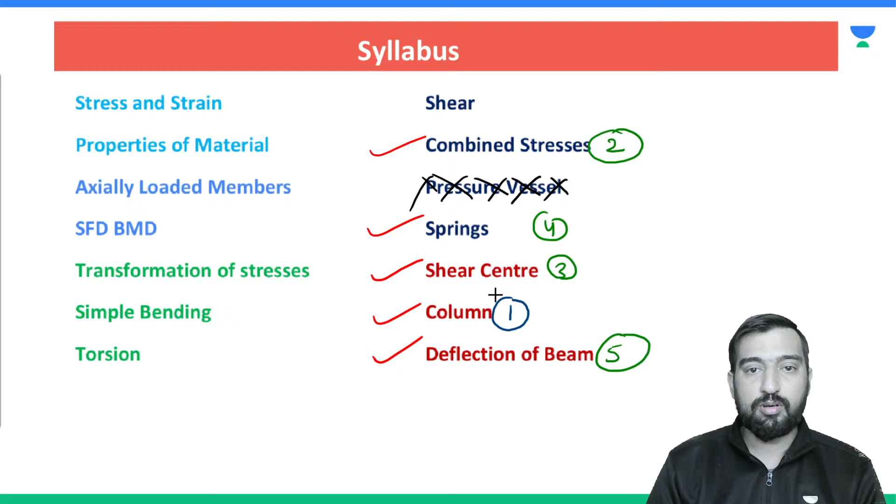So nearly 40-50% of the time I would like to spend on these 4 topics, and deflection of beam I am going to take at the end, because this requires more time.

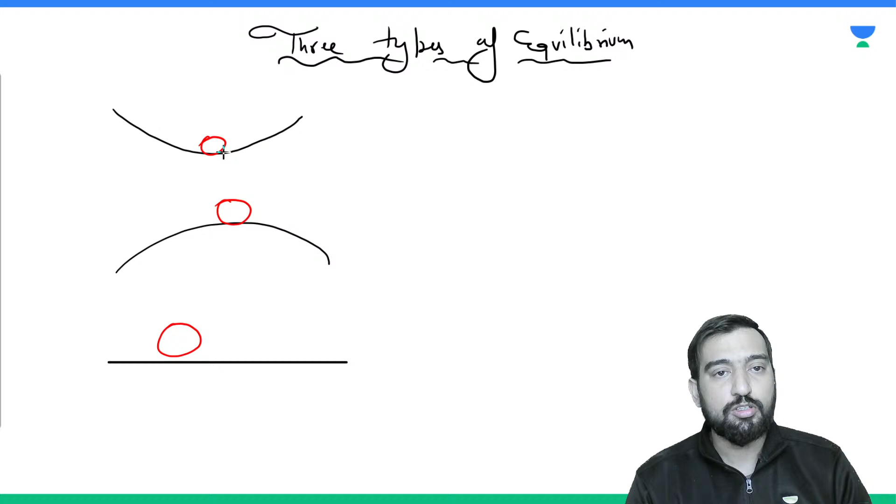Stable equilibrium is stable because even if you disturb this ball, or any system, by a small amount, it is not going to create a problem. After some time it will again come back to the original position, like your spring mass system, like your pendulum and so on.

Unstable equilibrium is where the object is at the verge of failure. The moment you touch it, the object is never going to come back to its original position. This is unstable equilibrium.

So this is stable equilibrium, this is unstable equilibrium, and neutral equilibrium is this. Here also the particle is in equilibrium, but if you disturb it, it will come to its revised position, but there also it will maintain its equilibrium. It is your neutral equilibrium.

So in the design and analysis of column, the thing we have to keep in mind is stable equilibrium. Based on that, you might need to do several calculations for calculating critical load.

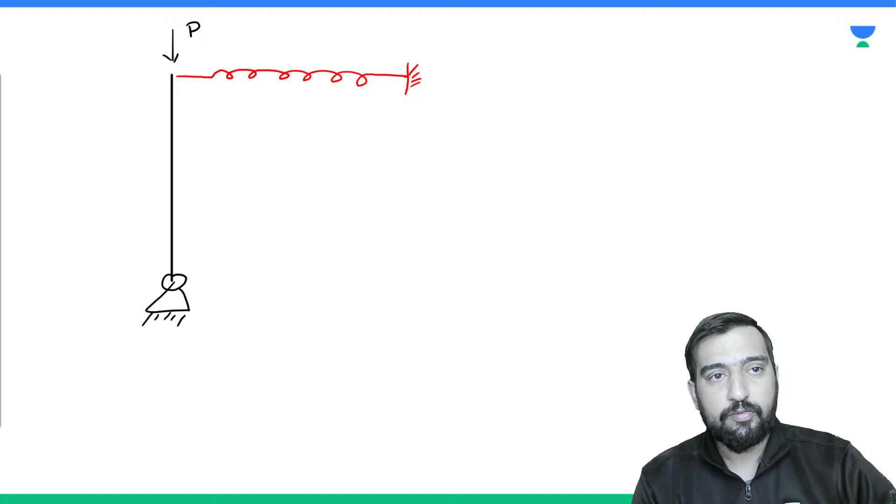For example, suppose this is the simplest of simple columns, not beam, attached to, let's suppose, some spring. I will give the introduction to spring now. Suppose if you apply here any load P, and if the stiffness of this spring is K, what is the critical load when it is going to fail?

It will fail when there is generation of an overturning moment. So what is the overturning moment here? On its deformation, it may deform like this, or vice versa can also be the case. So this is the revised position of P now.

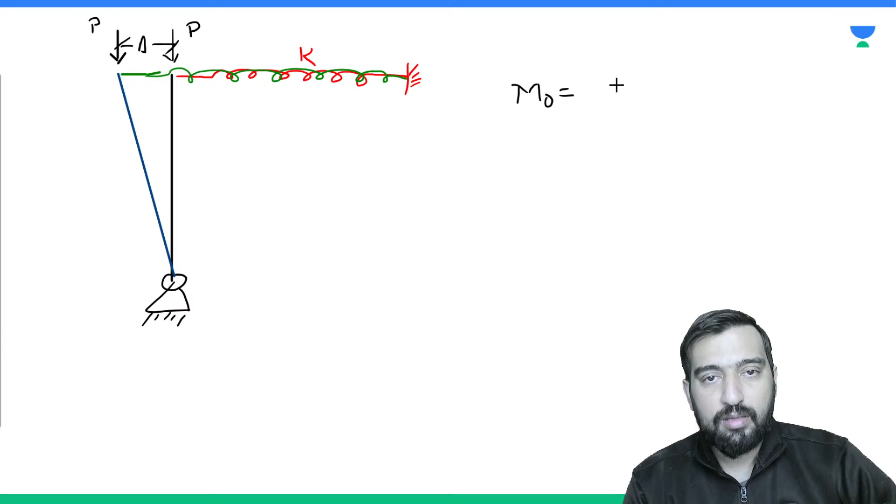Let's say this displacement with respect to its mean position is x, or you can say delta. This overturning moment is nothing but P into delta. Now what is the resistant moment if the length of this column is L? What is the resistant moment due to this lateral confinement, due to this spring?

If you draw the free body diagram of this spring, it will look like this. So here the force generated would be K into delta, and the same K into delta would be acting here. So resisting moment would be force into displacement into lever arm.

The lever arm is L. So for stable equilibrium, the overturning moment P delta is equal to K delta L. Delta and delta will cancel, and from here you can calculate the critical load, which is equal to K into L. As long as your load is less than K into L, you would be safe.

Similarly, you can repeat this exercise for multiple springs restrained at the same level as well as at multiple levels.

After this, we would be dealing with the various theories of failure of column. What are the various theories of column? Generally we use two, but let's go in order: Euler's theory we will be seeing first, and the second one is Rankine theory. Both of these theories we have to study here.

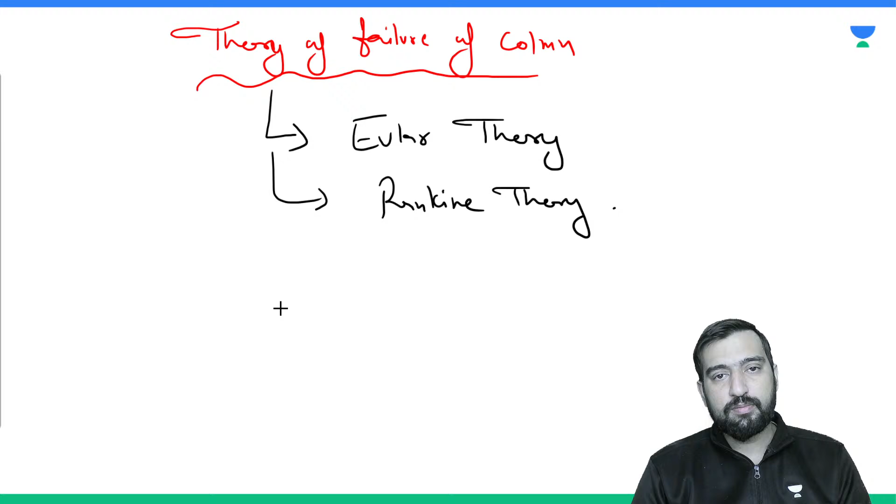So what are the various assumptions involved in Euler's theory? What is Euler's theory? I will explain. First, give the heading Euler's theory. Let's first write the assumptions, then I will explain in detail. The assumptions involved in Euler's theory are: first, that the material is isotropic, homogeneous, and linearly elastic.

Third assumption is very critical, and it is also a cause of limitation in Euler theory: here the failure is considered due to the long column, meaning failure will be due to buckling. So the column under analysis is assumed to be a long column. This is the limitation of Euler theory. That's why Rankine theory came, which took care of crushing for short columns as well as long columns. But Euler's theory is only valid for long columns, which have a higher value of slenderness ratio.

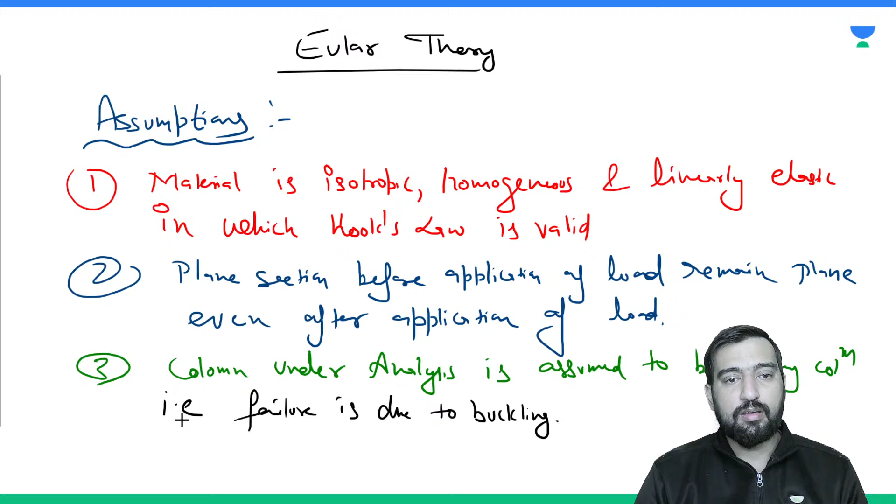So the third assumption means failure is due to buckling only. This theory is only for long columns. Are you getting the point or not?

One more assumption is there, which is a common sense thing: before the application of load, the column was perfectly straight. Initially the column is straight, meaning its line of action is maintained, before the application of load.

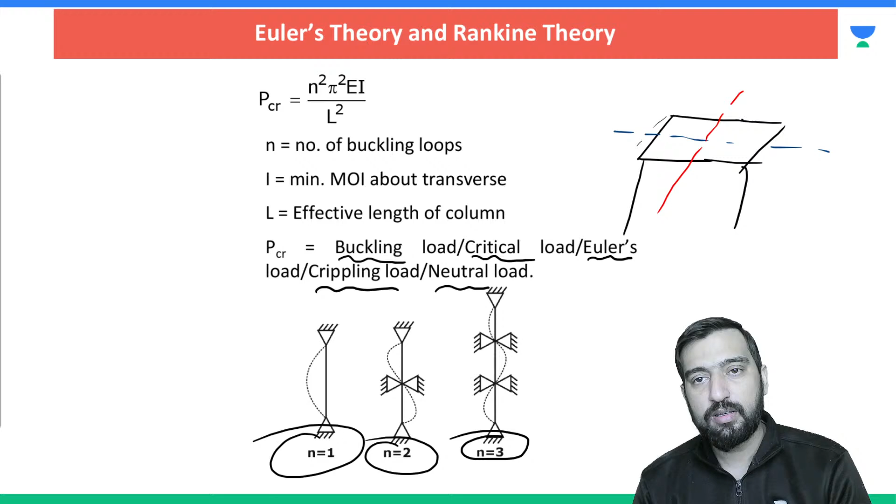So this is the value of n, and I is the moment of inertia of this column section about the transverse axis, and there are 2 possibilities while taking I. Suppose this is your cross section of the column, this is one axis, and this is another axis. So here you can see which cross section you take, moment of inertia about which axis matters - this is one case, this is another case. Whatever is the least moment of inertia, that we have to consider. That's why it is written minimum moment of inertia about the transverse axis.

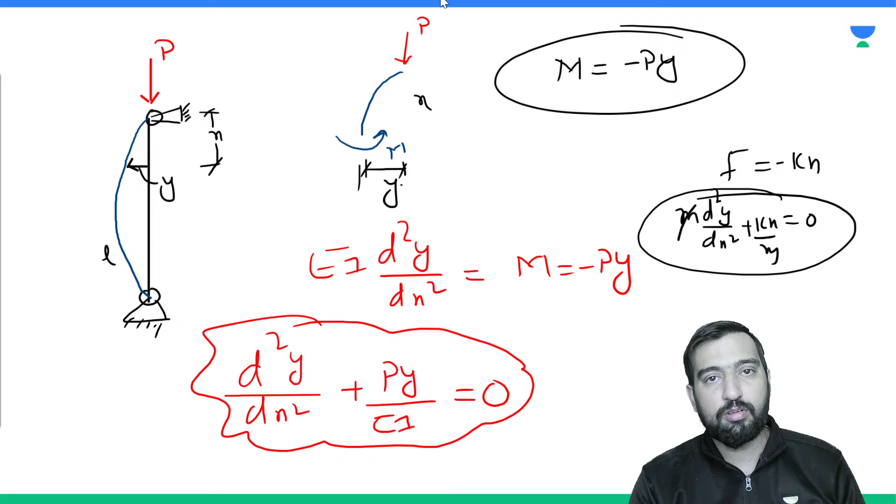and at x is equal to L, y is equal to 0. So at x is equal to 0, this is 1, this is 0, y is equal to 0, so c1 is coming out to be 0. At x is equal to 0, y is equal to 0, from that c1 is coming out to be 0.

And at x is equal to L, if I am keeping y is equal to 0, then I am going to get sin(L times under root p upon EI) equals to 0. Because c2 cannot be equal to 0, otherwise the solution will vanish.

So this is the condition from the second boundary condition, at x is equal to L, y is also equal to 0. Now the general solution of sin theta is equal to 0 is theta is equal to n pi. n pi, because sin 0 is also 0, 180 is also 0, and 360 is also 0, so n multiple of 180 degrees.

So if you square this, it is L square p upon EI is equal to n square pi square. So p is coming out to be n square pi square EI upon L square. So this is what we have written here, n square pi square EI upon L square.

So by using the double differential equation, we will be able to calculate the value of critical load, where n is the number of buckling loops, pi and EI is flexural rigidity, L is the length of the column. L is known as the length of the column. Are you getting the thing or not?

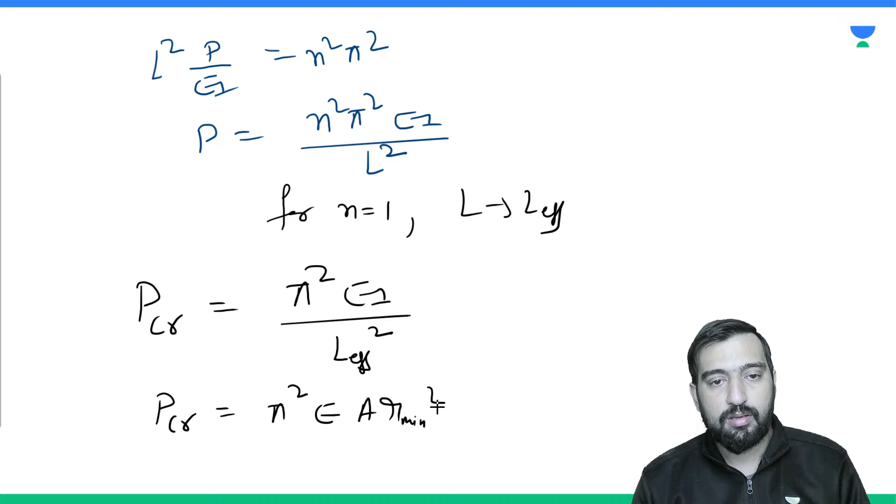So now PCR is equal to pi square E. What is I? I is area into R minimum square upon L effective square. So PCR can also be written as pi square E area upon (L effective upon R) whole square.

R is which one? Minimum radius of gyration, and L effective upon R, you all know it is known as the slenderness ratio. It is known as the slenderness ratio. So pi square E area upon lambda square, where lambda is

slenderness ratio. Okay, so now PCR upon area can be written as pi square E upon lambda square, and PCR upon area is known as the critical stress or buckling stress. So this is also the very common expression which we use in the analysis of column. I hope it is clear to you here.

So this is where sigma CR is buckling stress. It is buckling stress. And here L effective we have taken, and I hope you all know what is L effective. L effective is the distance between two zero moments. Let me write it.

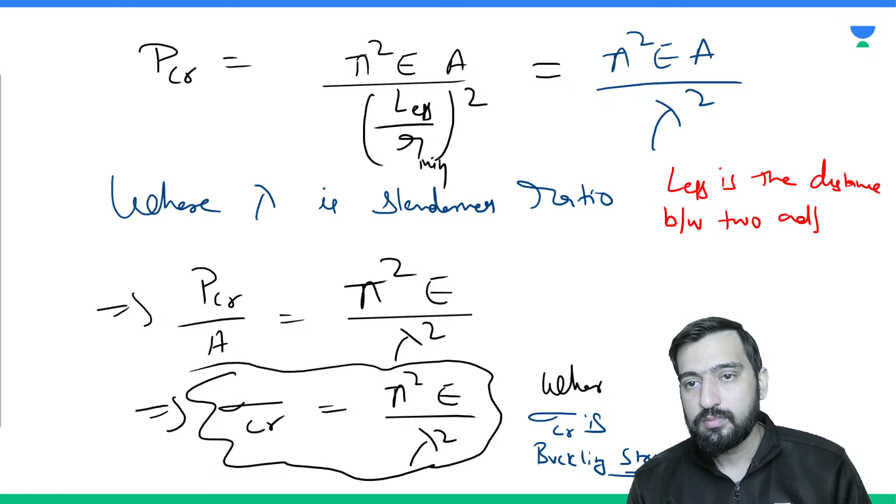It is the distance between consecutive contraflexure points, or you can say it is the distance between two continuous contraflexure points.

Now for calculating L effective, we have some different conditions, so let me revise quickly. If we have a pin end connection, what is L effective? Suppose this is L, then L effective is equal to L only.

Similarly, if we have one end fixed and one end pinned, then L effective is L by root 2. All these are the solutions of Euler's buckling theorem.

If both ends are fixed, these four cases are very widely used, then L effective is L by 2. If we have one end fixed and one end free, then L effective is 2L. So please remember at least these four cases of L effective.

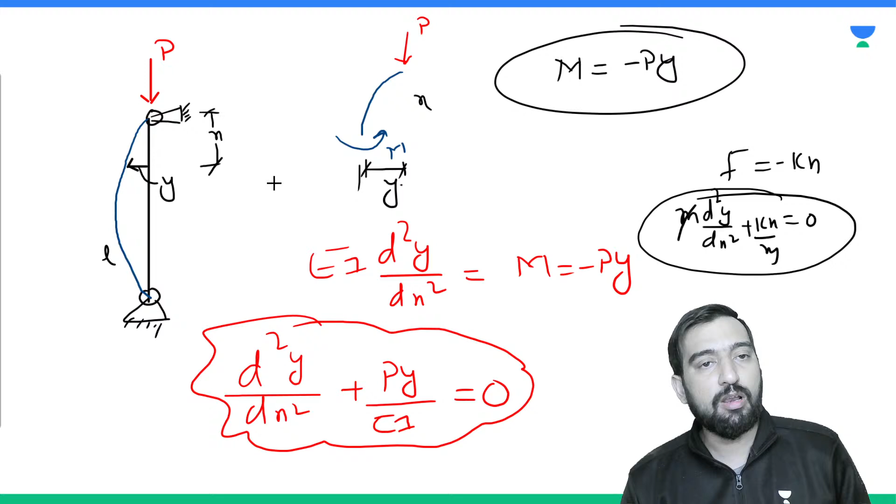You must have noticed when we derived this, we created a bending moment here, and bending moment is only there if the column is about to buckle. In a column, bending is only possible if it is subjected to some buckling force. So the first limitation is Euler theory is not applicable for short columns.

Yes, that means axial stress is not taken into account, meaning short column.

Why is it a limitation? Because in a short column, crushing happens before buckling, so it fails before buckling even occurs. Are you getting this thing or not?

So if somebody asks you what is the minimum slenderness ratio so that Euler's theory can be applied, if I ask you which is the minimum slenderness ratio above which you can apply Euler's theory, you can find it out. I think I have told you, not directly but indirectly. How? We have seen this.

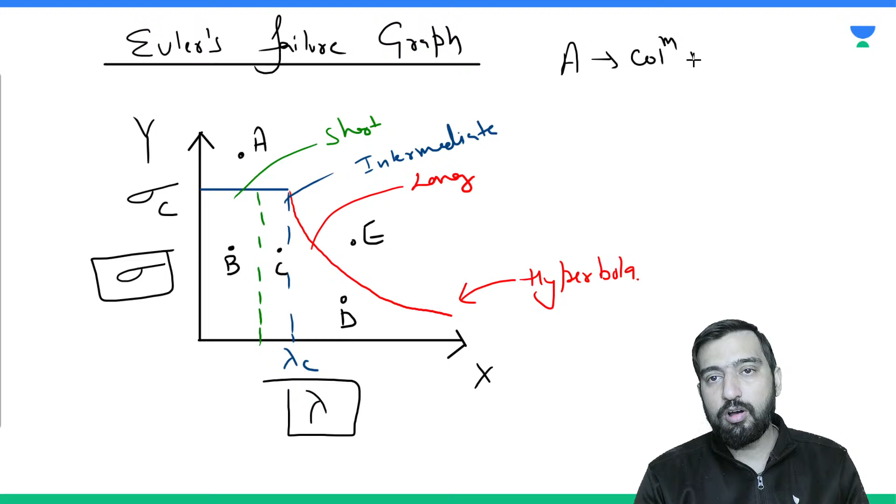If I am talking about point number A, this A point is lying in the short column zone, but the value of stress which A is going to experience is higher than the critical value. So at this A stress, my short column is going to fail. So A is giving you a point where column is short.

And it is unsafe. If I am talking about point number B, then again I can say that column is short, but it is safe.

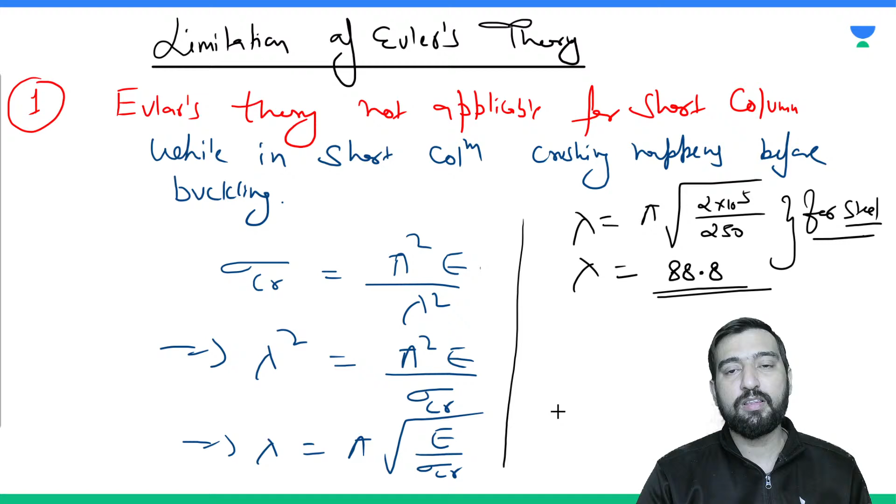Now this is all about Euler's theory. The crippling load expression I have derived for you, assumptions I have written for you. Based on the different end conditions, I have also given you the effective length. Limitations I have also explained, and when we can use it for particular material I have discussed, specifically for mild steel. This is the Euler's failure graph.

Now to overcome this problem, we do have Rankine theory. Rankine theory takes care of short column as well as long column. So first of all, it is applicable for long and short column both.

And it means, that is, it assumes the mode of failure as crushing and buckling both. Are you getting the point or not? Tell me.

Okay, here the Rankine crippling load or failure load is given by actually a harmonic average: 1/P is equal to 1/Pc plus 1/Pe, where Pc is due to crushing and Pe is your Euler load.

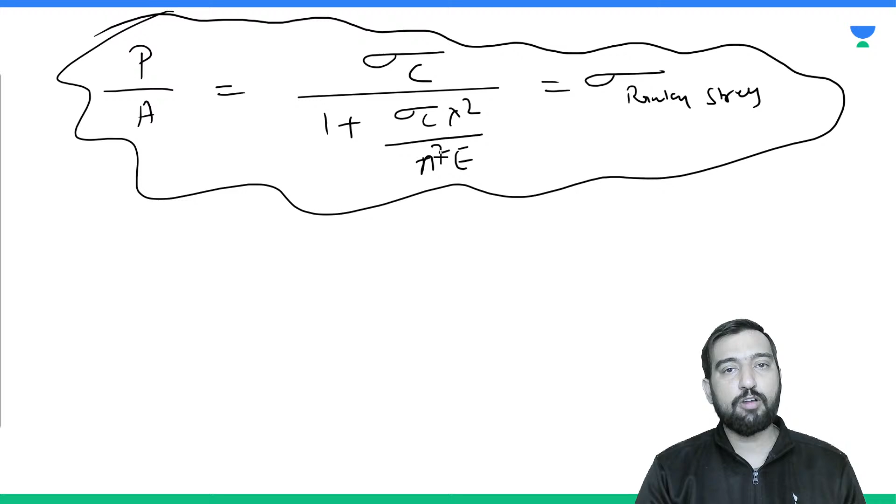We can also say that P by A is sigma c over 1 plus alpha lambda square, where alpha depends from material to material. For steel it can be different, for cast iron it can be different, for timber or wood it can be different. Generally alpha is 1 upon 7,500 for mild steel. It is 1 by 1600 for cast iron, and it is 1 by 750 for timber.

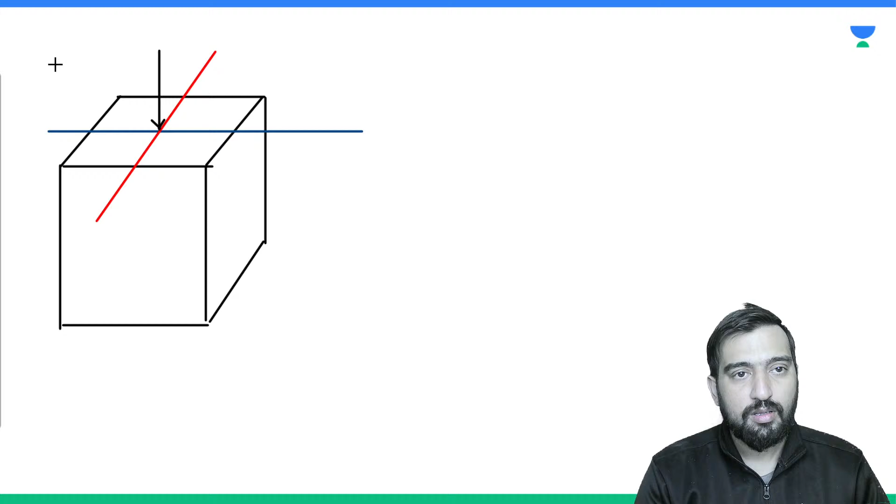If my load is acting over this intersection, maybe like this, so this is P, and let's suppose this column is fixed at base, and here its area is let's suppose A. Now what will be the stresses here?

The entire stress is due to the compressive stress. What compressive stress is acting here? It is P upon area. So here only one stress is acting, and that stress is normal stress or axial stress, that is P upon area.

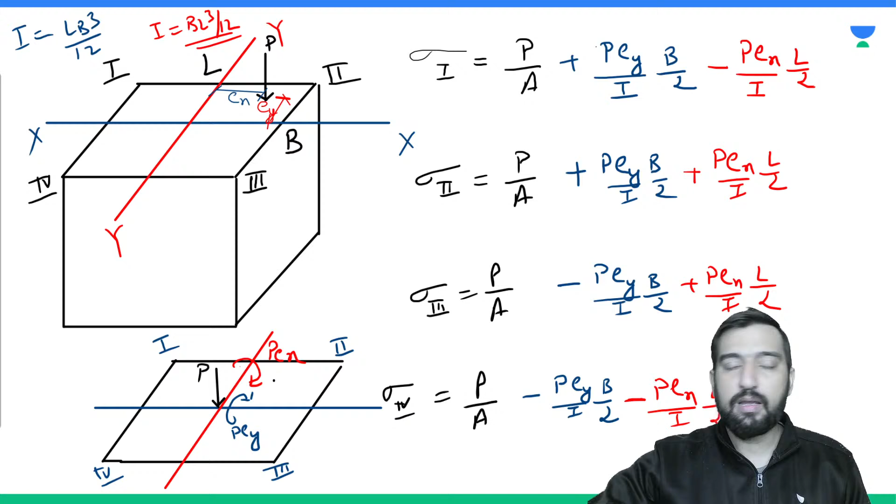So this is our x and this is our y. So this is all about combined stresses. We can make several observations out of here.

Okay, we can make several observations out of here, and you might have heard of the middle 1/3 rule. For uniaxial loading, suppose if this is my column, let's suppose this is L and this is B, and this is your x-axis, this is your y-axis. If you want to find what is the safe distance along one side of the axis such that about that axis no tension is developed, let's say this is P, and it is here at an eccentricity E.

So if you want to check for what value of E you are not going to have tension anytime, irrespective of the magnitude of load, then how do you calculate it? So tension would be developed at the critical surface. So this is my point number 1, this is point 2, this is 3, this is 4. So tension would be developed here in cases 1 and 4. So I can take either point, either 1 or 4.

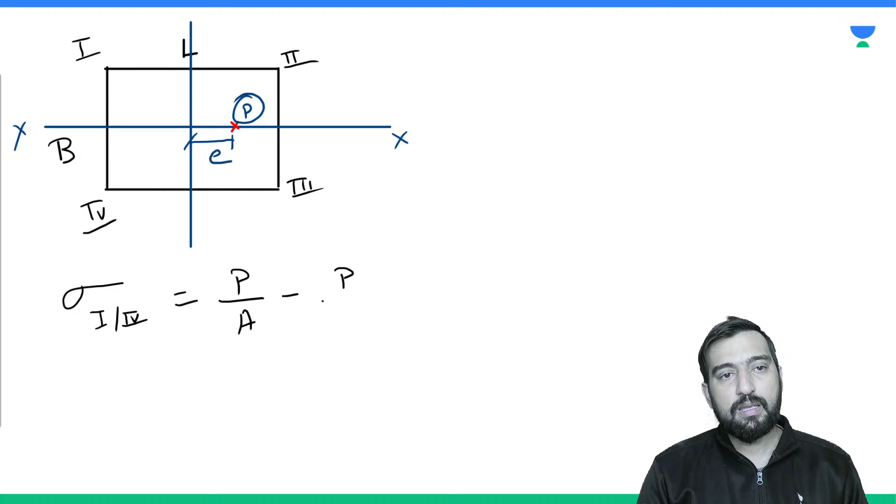So stress at 1 and 4 would be how much? This would be P upon area, minus PE upon I into Y. Y is here L by 2. So if I want to keep this stress always equal to 0 or greater than 0, let me write P upon LB minus PE upon I, where I is BL cube by 12, into L by 2. This I always need to keep greater than or equal to 0.

So if we are going to calculate: 1 over LB minus 6E by L square B is greater than or equal to 0. So L and L cancel, B and B cancel. So E is less than or equal to L by 6. Or if on one side E is L by 6, then on the other side it is also L by 6.

So indirectly, if we are keeping the load in the middle third portion, then we will never be getting tension in our column, irrespective of the magnitude of the load. Whatever is the magnitude of load, if that load is lying within the 1/3 portion, then no tension will be developed. Okay, is it clear?

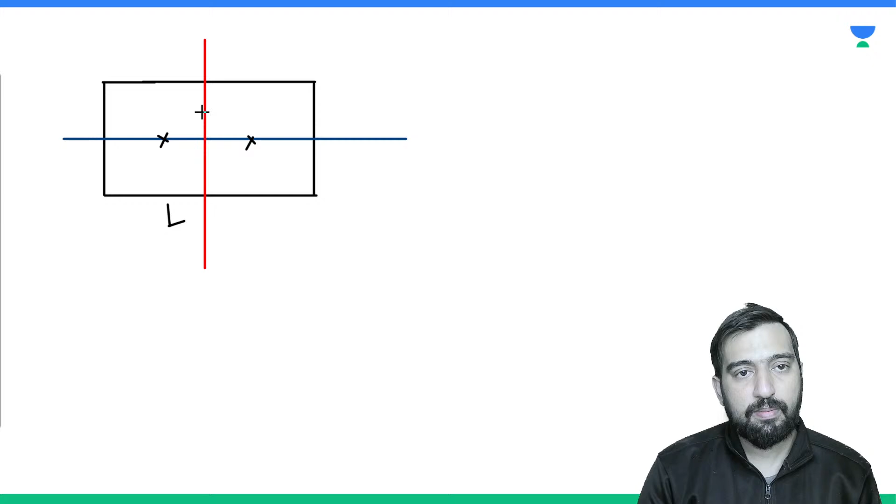This is L/3, this is L by 3. Okay, this is B by 3, this is B by 6, B by 6, B by 6, L by 6, L by 6.

So for 2D bending, for combined bending, if you are joining these 4 points, then in this area, wherever you are going to provide load, it is never going to give you tension at any corner. This area is known as kern, K-E-R-N. This area is known as kern. And here you can see that this rectangular column is going to have this kern.

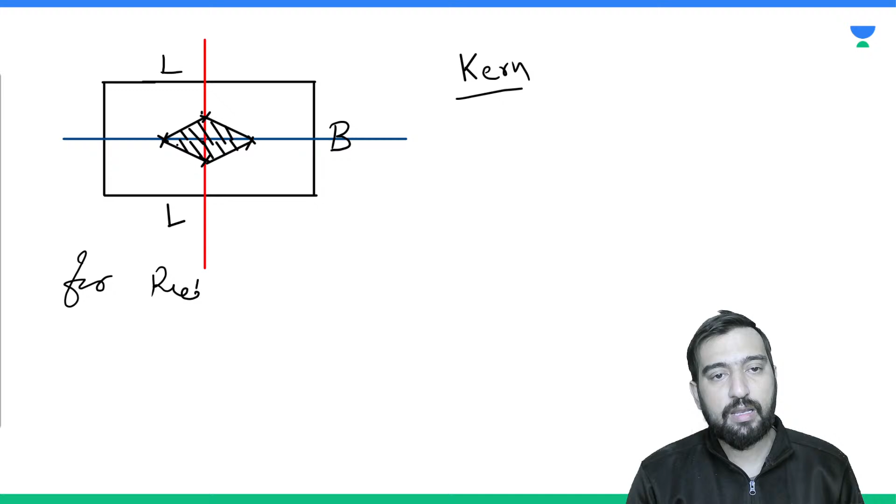So you know that if this is rectangular, for a rectangular beam, kern is a rhombus. Okay, within the kern, if load is applied, then no tension is developed on the cross section. Okay.

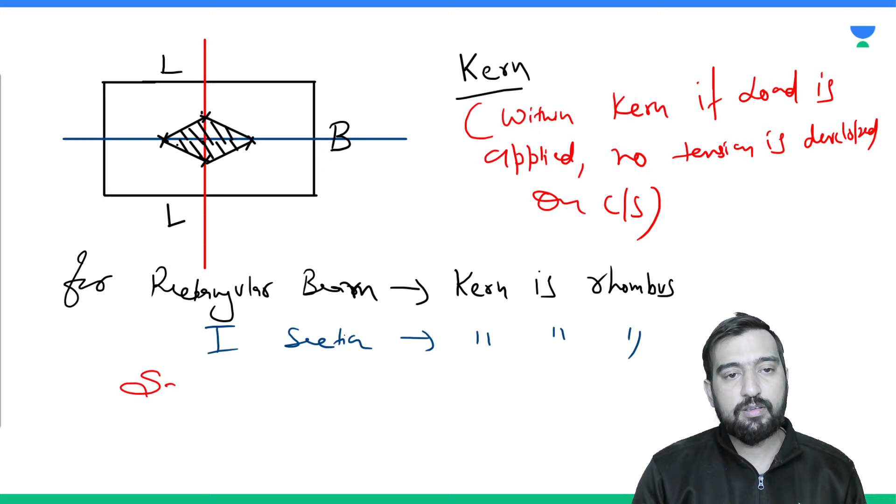Now someone might ask, for an I section also, is your kern a rhombus? For a square section, anybody, what is the shape of the kern of a square section? It is square only. And for solid circular section, the shape of the kern is circular only. And for hollow circular section, the shape of the kern is circular only. Yes, it is the safest part of any section. Yes, all circle, for solid circular and hollow circular.

And in case of circular section, the diameter, I think it comes out to be d by 8. Yes, and the middle portion is d by 4, 25% of the diameter. Okay, 25% of the diameter is safe. In the middle, 25% is safe in case of a circle.

You can also check this. Suppose we have a circle, and let's check it. It's not a straight line. So if this is the position of the load, let's say this one, then here P upon area, pi by 4 d square, minus P into e upon I into y, is greater than or equal to 0. So P and P cancel, pi and pi cancel, d square and d cancel, and this becomes 16. Yes, e is less than or equal to d by 8. So it is d by 8. So its locus is symmetrical. So it is going to be like this. So this is the kern here.

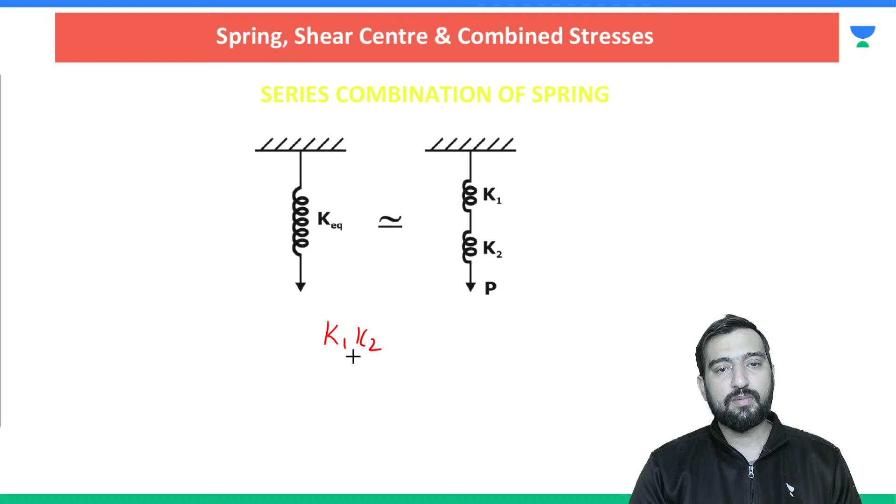And we all know how we do the calculation in series and parallel. So if this is a series connection, then the K equivalent would be product by sum. And if it is a parallel arrangement, then it is simply addition of the individual stiffnesses - it is K1 plus K2, and we can calculate the combined value.

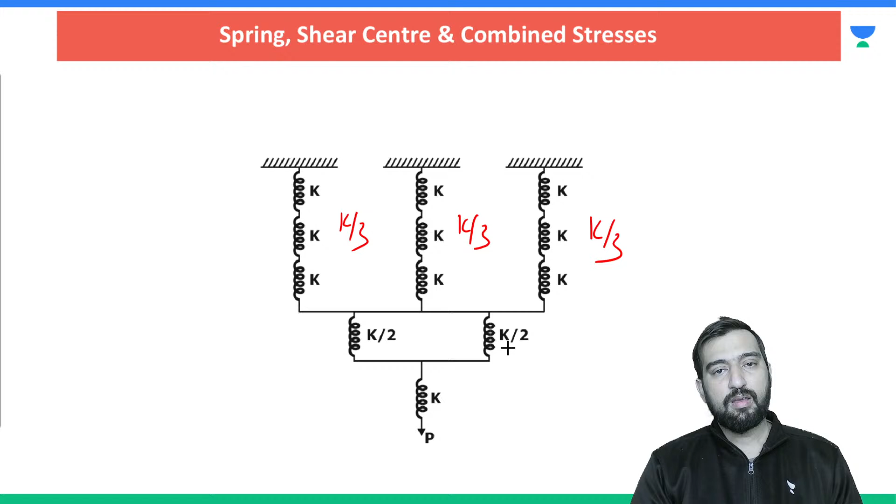So here it is K, so it would be K by 3, K by 3, K by 3, and this K by 2 and K by 2 is there, and these both are parallel so they become K only, and these three are parallel so they become K only, so overall answer is K by 3, because again this and this would be in series, so overall answer would be K by 3.

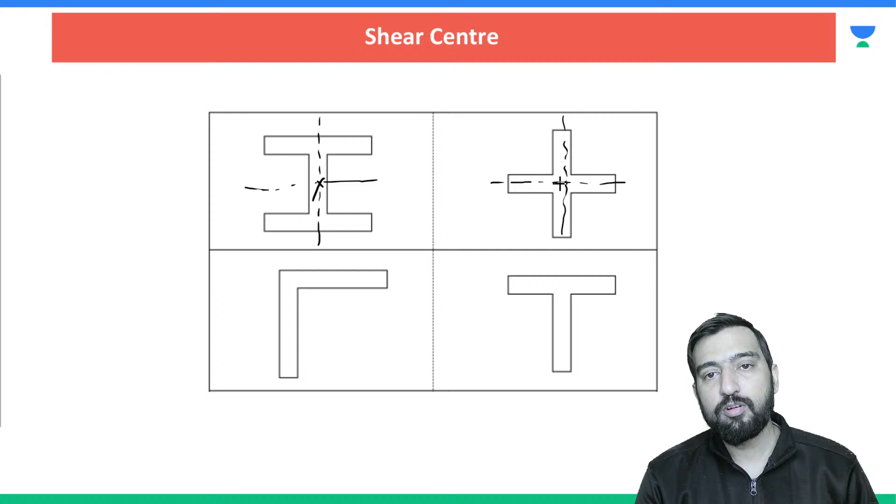अच्छा, यहाँ पे shear center कहाँ होगा? It is having two axis of symmetry, it would be here. It is having two axes of symmetry, it would be here. It is having no axis of symmetry but intersection is here. It is having two rectangular, it is here. So these are the possible ways to locate.

It is not center of mass. No, please do not confuse with the center of mass. है ना, यहाँ पे center of mass थोड़ी ना यहाँ पे आता है, इधर center of mass यहाँ थोड़ी ना आता है. ये वो center है जिसके about आपकी eccentricity develop नहीं होती है, और eccentricity develop नहीं होगी तो torsion नहीं होगा. It is not center of mass, dear दक्ष. आर यू गेटिंग द पॉइंट और नॉट? क्लियर है?

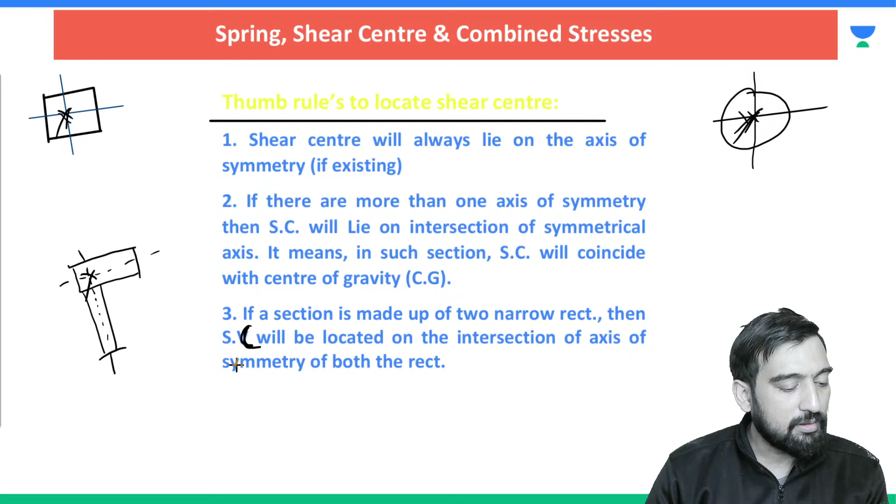होलो सर्कल और ओपन स्लिट में डिफरेंस क्यों है? अगर ये कंप्लीटली क्लोज्ड होता, ठीक है, अगर ये कंप्लीटली क्लोज होता डियर then it would be center, because multiple axes of symmetry are going to pass through center only. But due to this open gap, it is acting like a C section.

इसके अंदर जो प्रॉपर्टी आ गई वो C section की आ गई. And on C section, center is deviated on one side. So here as well you can see center is deviated on one side. But had it been a case of hollow circular, then it would be having multiple axes of symmetry, and the shear center must have passed through the center of the circle.

Okay. Clear hai? Is it clear here? It is not connected now, it is not uniform now. It is going to act like a C section. Are you getting the concept, ऋषिकेश?

चलिए अब स्टार्ट करते हैं अपना आखिरी टॉपिक, ड्रैगन टॉपिक. ये है हमारा स्लोप एंड डिफ्लेक्शन. एक ब्रेक ले लेंगे इससे पहले, स्लोप एंड डिफ्लेक्शन चालू करने से पहले एक ब्रेक हो जाए.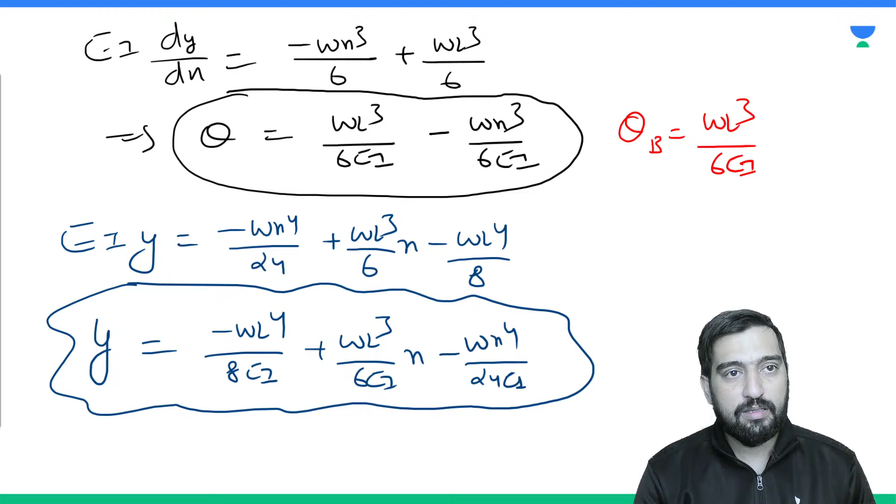So you can check the deflection at x is equal to 0. The deflection at B is equal to minus WL4 upon 8EI.

One time integration gives slope, two time integration gives deflection. Equation of slope and equation of deflection. But after that you have to play the game of boundary conditions. And you can check out these two results, 1 by 6 for theta and minus 1 by 8 for deflection. Focus on the magnitude.

And you were saying I should show you whether it works or not - you can see it. You can match the result here. Is it matching, dear? 1/6 and 1/8. Okay, so this is how we are going to use the double integration method.

There is one more method, an extension of the double integration method, known as Macaulay's method. Actually, when there are multiple loads occurring here, here, here and here, in order to incorporate all these loads, you need to make several functions of bending moment - one running from here to here, second from here to here, third from here to here. Such an equation when it takes this form is known as Macaulay's method.

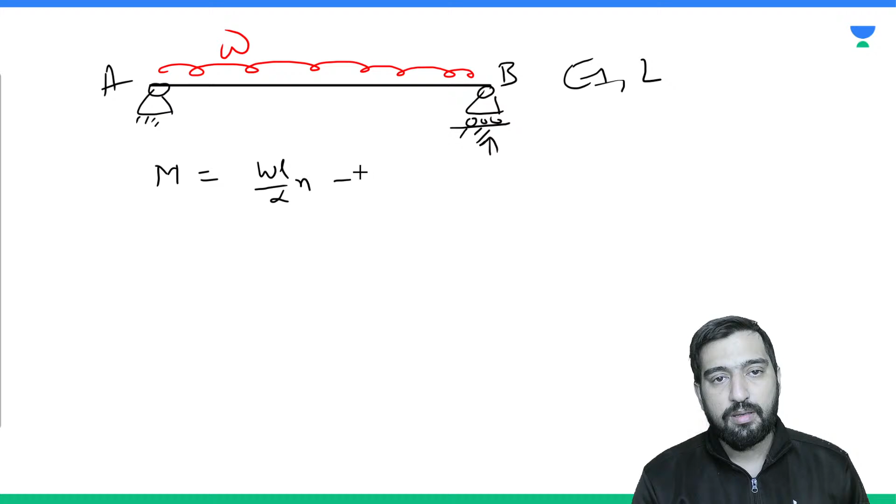So what is the bending moment equation? Bending moment equation from either side, it is WL by 2 into X minus W into X square by 2. And the good thing is this equation is going to work for the entire system.

Now if I am going to apply the double integration equation, EI d2y upon dx2, it is M. So d2y upon dx2 is WLX by 2 minus WX square by 2 into EI. Now integrate it twice. One time you will integrate it, you will be getting what?

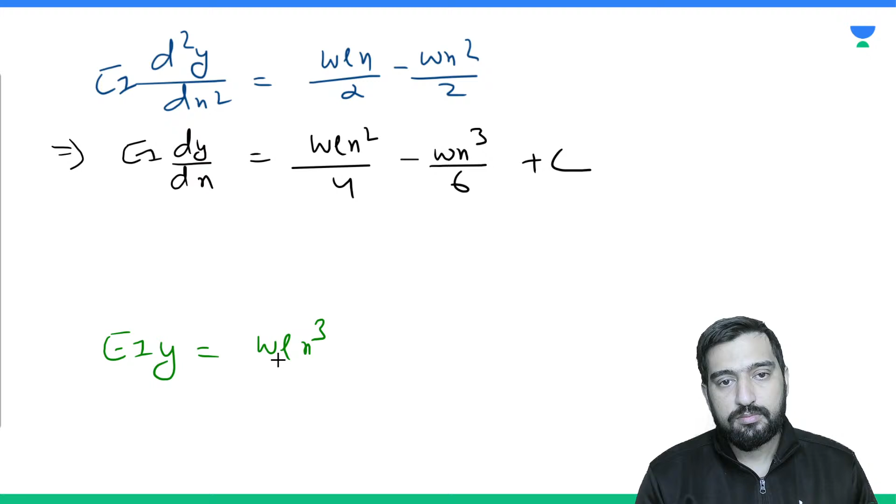Can you tell me how to find C and D? Anybody? Can you tell me how to find C and D? What can be the boundary condition here? Anybody?

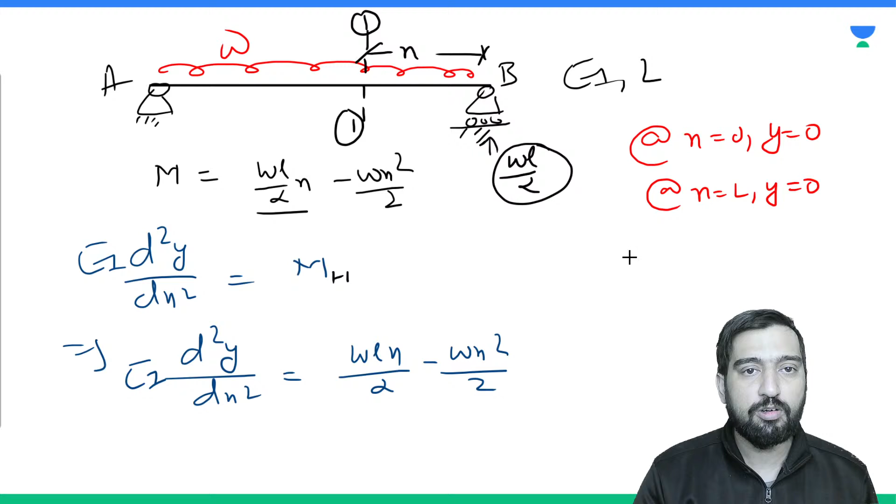So like this you can solve the problems on slope and deflection by using double integration method. And you know one good thing about double integration method, by using it you even can solve indeterminate structure. For example, we all know that this propped cantilever beam is an indeterminate structure.

We all know that fixed beam is an indeterminate structure. With the help of double integration method,

Sir, you said double integration method is good for simply supported beam, moment area method for cantilever, and strain energy method for any type of beam and frame.

Yes, I told it once, and that is also right. Double integration method is good. Actually, what I told, I am reminding you because I generally say the same things all the time. Double integration is only useful whenever you need a continuous result, the equation of slope and deflection.

Moment area method you can apply whenever there is a case of cantilever beam, or if it is a case of simply supported beam, but the simply supported beam must be symmetrically loaded. If the simply supported beam is not symmetrically loaded, you can go for conjugate beam method.

And whenever your simply supported beam is subjected to internal discontinuity like an internal hinge, you can still go for conjugate beam. But whenever you want to tackle any problem which cannot be solved easily by any of these methods, go for strain energy method, because it is a universal method, applicable for trusses, frames, arches, and every kind of frame.

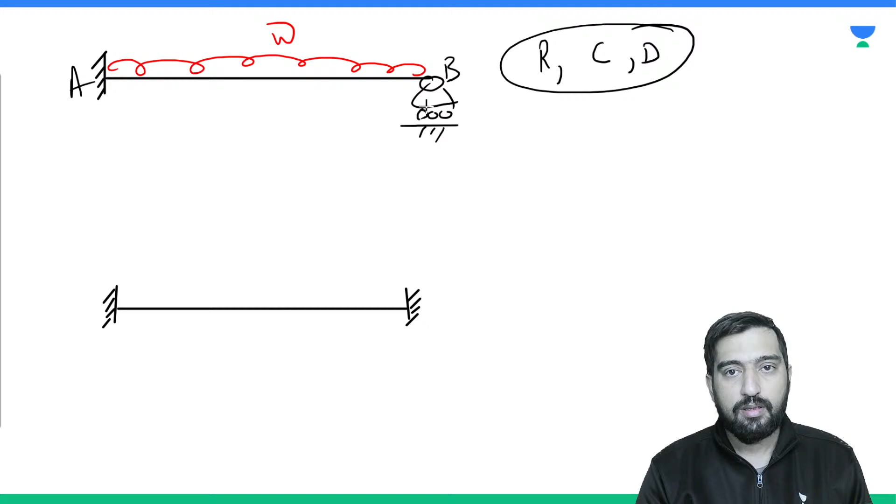So here the boundary conditions, 3 unknowns are there. At x equal to 0, y equal to 0. At x equal to L, y equal to 0. And at x equal to L, dy by dx also equals 0. So with the help of these 3 boundary conditions, you will be able to obtain R, C and D.

So your structure is solved now. Similarly, if some load is acting here, you will be needing some boundary conditions as well.

So for vertical loading, its static indeterminacy comes out to be 2. 1 reaction, 1 moment, 1 reaction, 1 moment, so you can tackle only 2. 2 unknowns are there, R1 and R2 or M1 or R2 or whatever, and 2 constants are there.

So how many boundary conditions do we need here? 4. At x equal to 0, slope is 0. At x equal to 0, deflection is 0. At x equal to L, slope is 0. At x equal to L, deflection is 0.

So by using these 4 boundary conditions, you will be able to calculate all 4 unknown parameters, and your structure becomes quite solvable. Is it clear? So this is the way to use boundary conditions, this is the advantage of using double integration method, because it also helps sometimes in your structures.

For plane structures without internal discontinuity, even if indeterminate, you will be able to solve it using this method, but it is slightly lengthy if you do not know the standard results. If you know the standard results, I will recommend other methods like moment area method, conjugate beam method, and strain energy method.

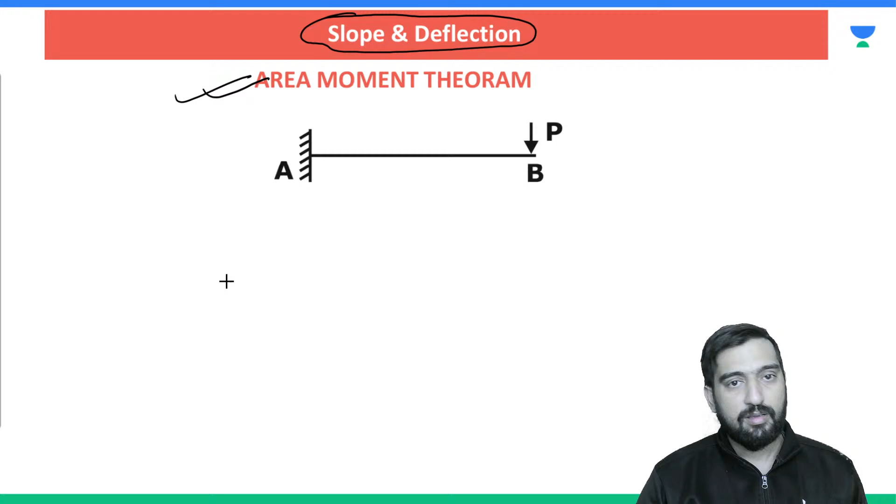Now the second method to calculate slope and deflection, which is also very famous, is known as area moment or moment area method. So in moment area method as well, it is suitable for cantilever,

and it is also suitable for simply supported beam if it is symmetrically loaded. Symmetrically loaded may be like this, it may be like this, or it may be like this. So all these are the various symmetry, or it may be like this.

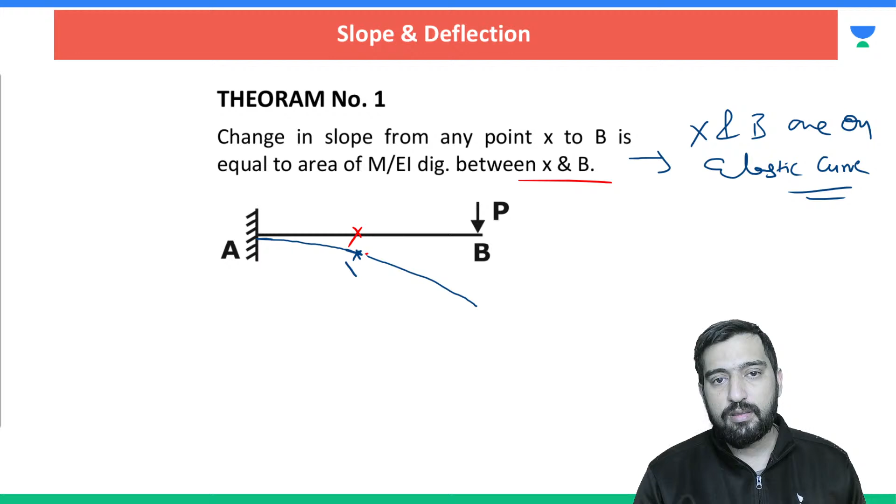So this change in slope is equal to the area of M upon EI diagram bounded between b and x. So suppose this is the area of M upon EI diagram. This is the area of M upon EI diagram.

Okay, this is M upon EI diagram. Can anybody tell me why this slope and deflection is also a function of E and I? Why is this slope and deflection also a function of E and I? It is quite obvious that due to the bending moment, more deformation, more curvature of the elastic curve, so more value of slope and deflection. But why is it depending upon E and I?

Because this slope and deflection is not only a function of action but also of the resistance of your material. You all know that if the same load is applied onto different materials, let's say one is copper, another is aluminum, or third one is steel, so all these three with uniform cross section, although having same end conditions, are going to give you different values of slope and deflection as per their material capacity. So this slope and deflection is a function of action as well as of reaction, and that's why we need to incorporate one parameter of material property, which is E here.

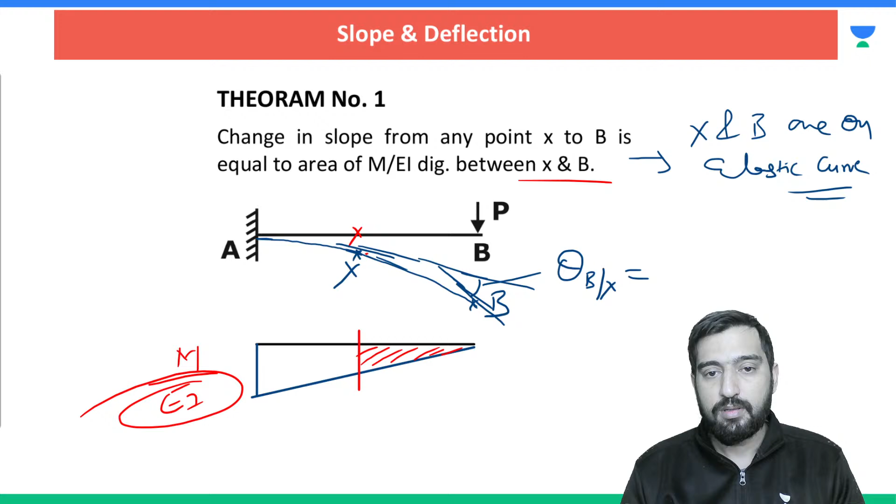So this is theorem number 1. What does theorem 2 say? Theorem 2 says that if you want to find deflection of any point B with respect to the tangent drawn from any point X, it is equal to the moment of area of the M upon EI diagram between X and B, taken about B. If you are calculating deviation of B with respect to X, then you have to calculate it about B. If you are calculating deviation of X with respect to B, then you need to calculate it about X. So this moment is to be taken about that point where we are going to calculate deviation.

Again, if this is my deformation pattern, and let's say this is my B point, and this is my X point. If I want to know how much B is deviated from the tangent drawn from X, let's say the tangent drawn from X is this much, and the tangent drawn from B is this much. So this is the deviation of B with respect to the tangent drawn from X, and this deviation of B with respect to X is equal to...

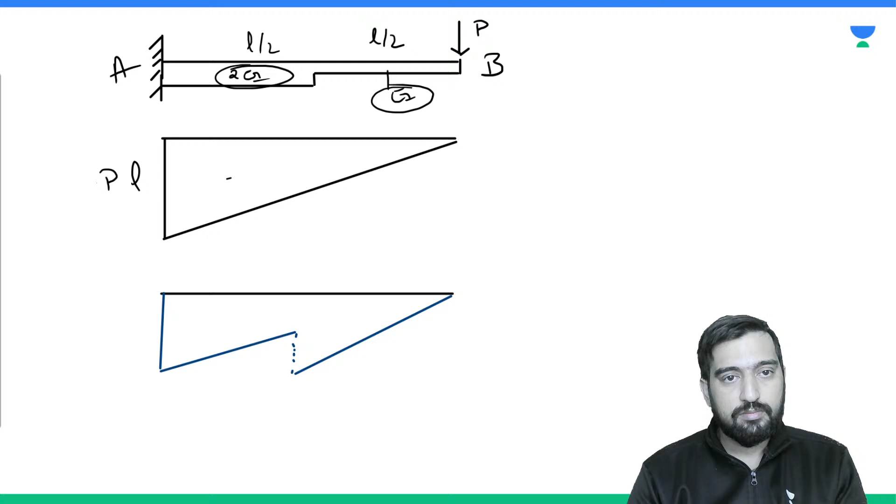So this value is basically what? It is PL by 2. So what about this value? It is PL upon 2EI. Then again it will be falling to PL upon 4EI, because the moment you go just right to it, just left to it, flexural rigidity is just double. So again it is PL upon 2EI.

So now if you want to calculate theta B, then calculate with reference, and reference is theta A, because at A slope is 0. So this is the elastic deformation. So you need to calculate theta B. How do you calculate theta B? Theta B is the change of slope between B and A, and A's slope is 0. So whatever change there is of B with respect to A is the ultimate absolute value of slope.

So this is area of the M upon EI diagram between A and B. This is area of this triangle plus area of this trapezium. Let me divide this trapezium further into rectangle and triangle. So area of this triangle is half into base into height, plus area of this rectangle is PL upon 4EI into L by 2, plus area of this triangle is half into base into height.

So this theta B is PL square upon 8EI plus PL square upon 8EI, plus PL square upon 16EI. So how much does theta B come to? 8, 2 and 2, 4, 4, 5, 5, PL square upon 16EI. Are you getting the point or not? This is 5 by 16 of PL square upon EI.

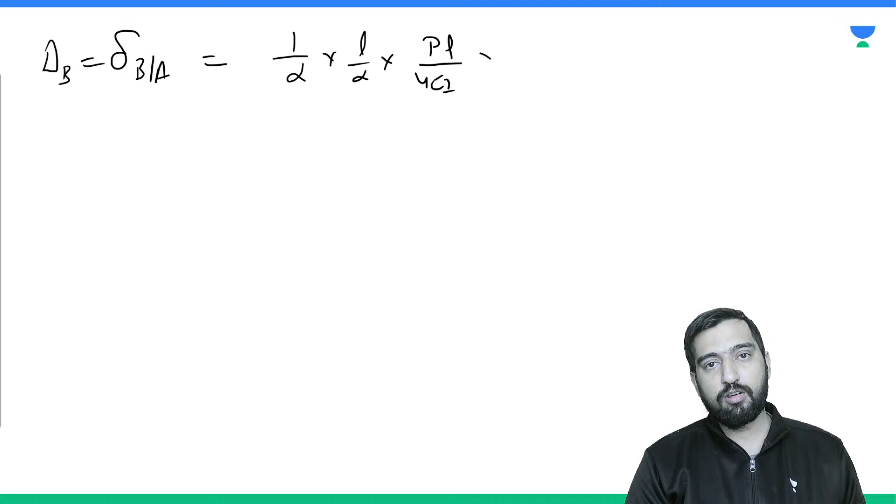So CG calculation we have to do about B only here. So this area is a triangle, so it is half into base into height. I am not giving importance to sign here, although it should be negative, and its CG is 2 by 3 of L by 2, plus this is the rectangle. What about this rectangle? It is PL upon 4EI into L by 2, and its CG is L by 2 plus half of L by 2. It is half.

So like this you can calculate, and you will be able to calculate the deflection at B. So this is the procedure to use the moment area method. Tell me if any one of you has any doubt.

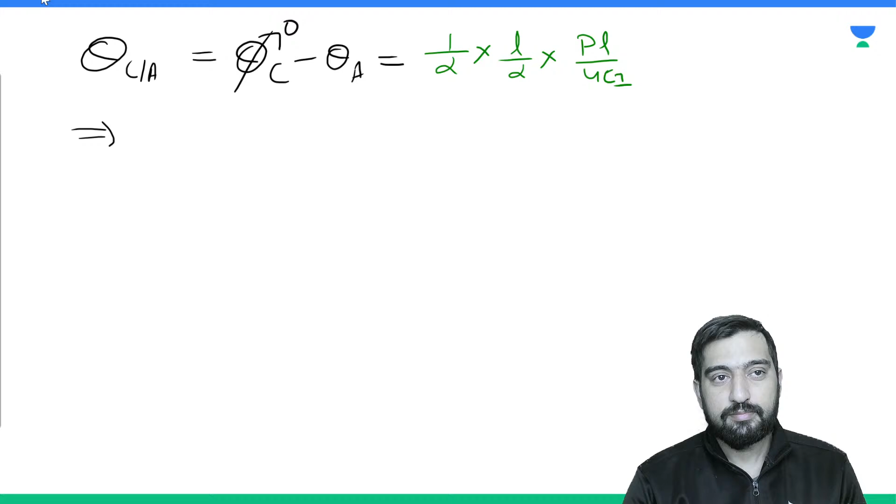So theta A is PL square upon 16 EI. Theta A, this negative will come here. So PL square upon 16 EI. Tell me, clear?

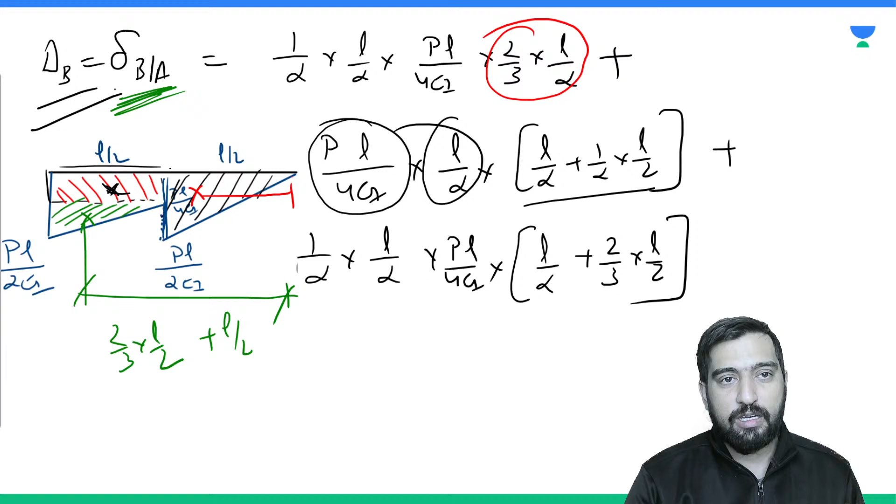Will you be calculating deviation of C with respect to A, or you will be calculating deviation of A with respect to C? Like when we calculated central deflection at B, we calculated deviation of B with respect to A. But tell me in this case, what you want me to calculate? Red wala deviation of C with respect to A, ya phir blue wala deviation of A with respect to C?

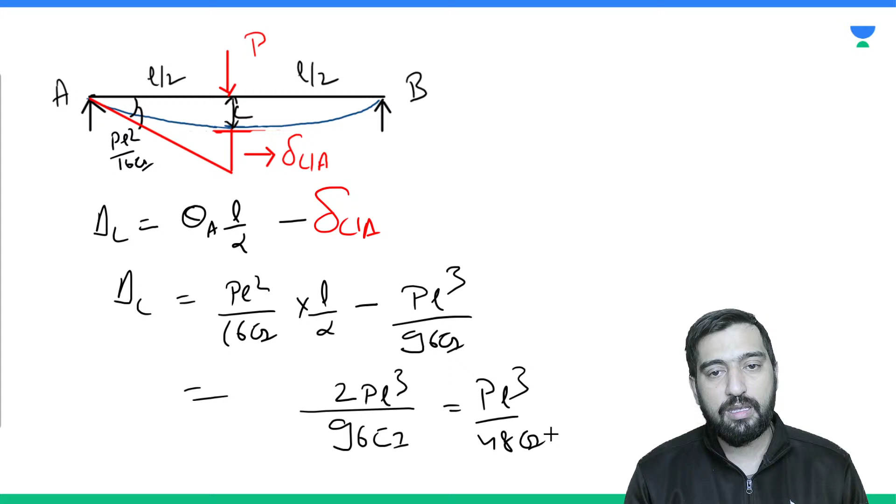So see, we have reached to the same result. Yes, Sachin is right, Sachin is right.

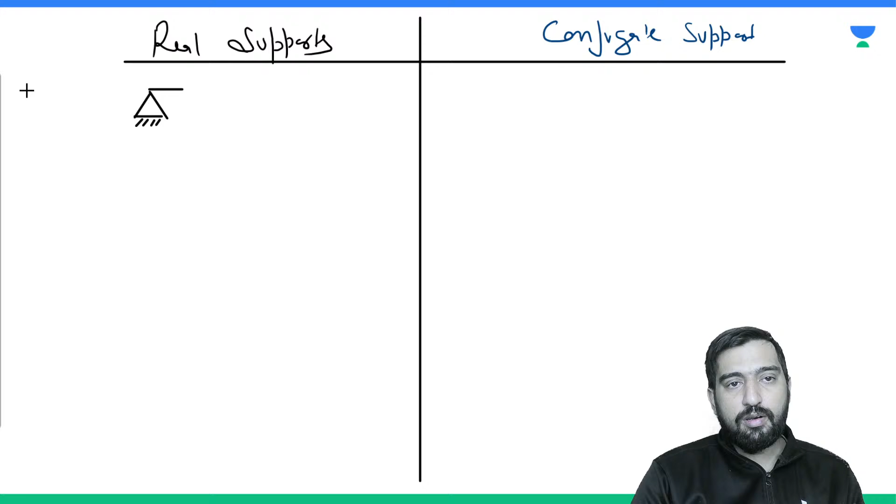So tell me, my dear friends, suppose if I have a hinge support or a roller hinge support, then theta will be there but deflection is not there. So suggest me something in conjugate support which should be having shear force but is independent of bending moment, because the deflection in real support is 0, so we do not need anything on the name of bending moment in conjugate support, but theta is existing here, so I need something which can bear some shear.

Tell me, suggest anyone. So this is your hinge or roller hinge. So it is equal to hinge only, or say it is roller hinge only, or simply say roller hinge only.

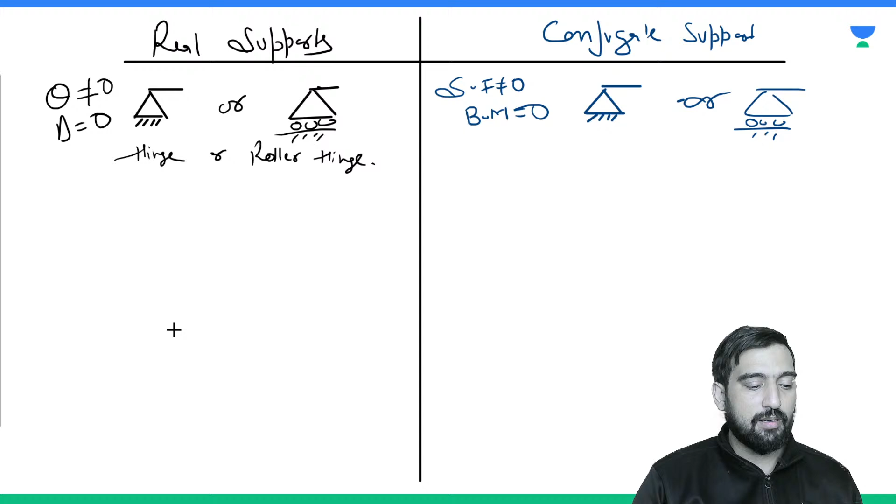You can see on hinge support shear force exists, but bending moment is 0 whenever your hinge support is coming at the end. Yes, Sachin is right, Daksh is right, exactly, because it is a type of support which has reaction, so it carries shear, but it does not have any bending moment. It's not like that your hinge support cannot carry moment - moment can come here, but for that it should come in between, or your member must be overhang. But whenever your hinge support comes at the end, it is free from bending moment, because whatever rotation is required to dissipate the bending moment, that much rotation it is going to give the member if it is located at the end.

So that is the case. Case number 2: suppose if we have fixed support, we all know that at fixed support slope is not there, deflection is also not there. So tell me, propose me a conjugate support where shear force should be 0 and bending moment should also be equal to 0. Do you really think there is any support which is going to carry both of these stress functions as 0?

Yeah, very good, Daksh. It's free, or free support, or free without any support. So you have to keep this fixed portion free. I am only focusing on this end - don't think that it is free, I am only interested in the supports right now. So this is free, this is free.

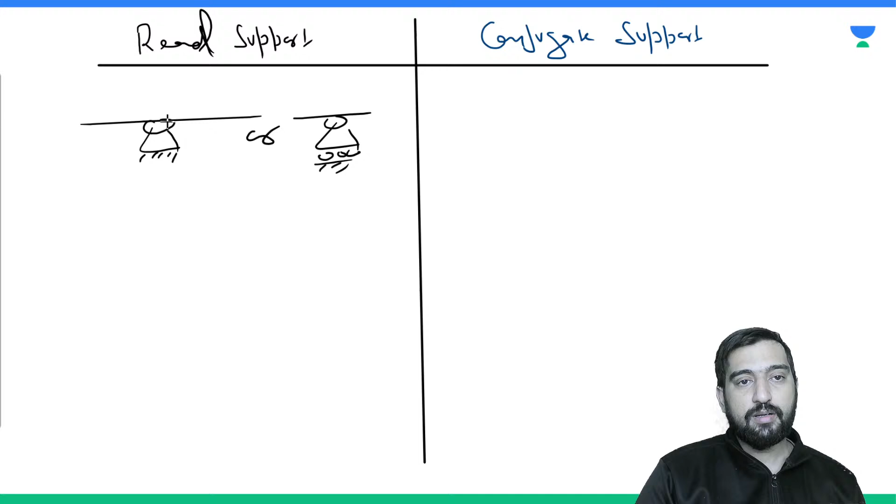Similarly, my dear friend, if we have something coming in between like internal hinge, for that also we have the alternative. Suppose we have real support, and what is conjugate support? Suppose we have something like this or like this. Roller and hinge are not going to make any difference in beams because they are not in the slope and deflection domain, since here slope and deflection are calculated only due to bending moment - unless it is a case of truss. Here theta is not equal to 0, but delta is 0.

So tell me something where shear force should come but bending moment should be 0. Tell me this case, all of you. It is internal hinge. It is internal hinge.

Last, suppose if there is internal hinge, then you know at internal hinge what is happening - theta exists, delta also exists. So suggest me something which should come in between, and it must contain shear force as well as bending moment. So what can be the possibility? Yes, hinge. Okay, next case, tell me the possibility.

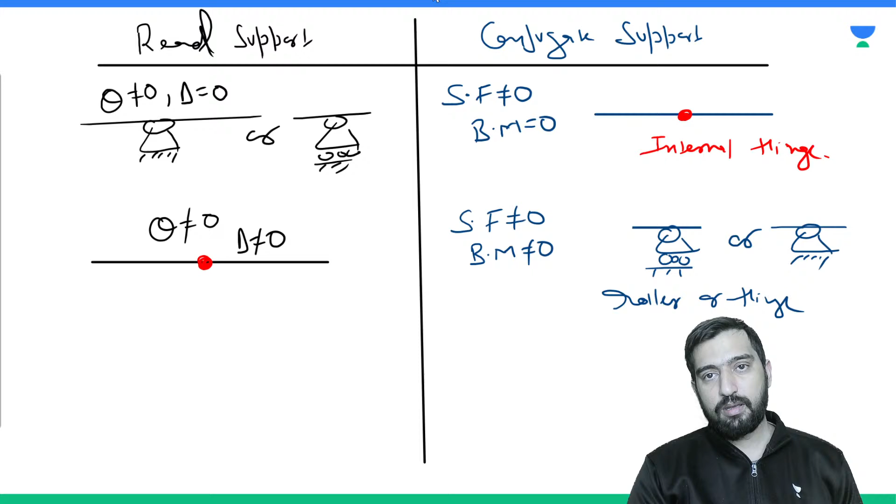So that is the case here. Can you draw some conjugate beams if the real beams are known to you? Like this is the real beam. If I want to draw the conjugate beam here, don't you think it is going to be same? So in simply supported beam, real beam and conjugate beam are same.

But here you can see, it is just like your mirroring. That is the reason why they call it conjugate, because in some structures mirroring happens. So they are conjugate. Even here you can draw this beam like this up to some extent, which also gives you the feeling of mirroring, conjugation. Not always, but in most structures it happens.

Now here fixed will become free, and free will become this. This will become internal hinge, and this will be roller support. Here also you can see some extent of mirroring. It may happen or it may not happen.

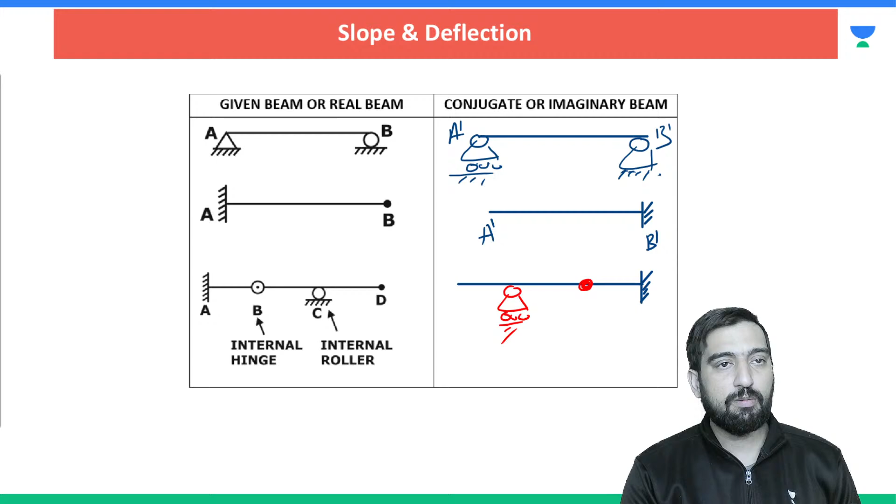But what you can see here, this is my real beam, given beam. In all these three cases, my real beam is stable and it is determinate as well. My conjugate beam here is also, you can check the stability, and they are determinate as well. So real beam is stable and determinate. If real beam is stable and determinate, then conjugate beam is also stable and determinate.

But what happens if my real beam is unstable? Suppose if my real beam is unstable, let's say like this. So what about the conjugate beam? If real beam is unstable, then the conjugate beam, it is fixed, it is free, and it will remain as it is, or at most you can make it roller. So if real beam is unstable, then you can see conjugate beam is indeterminate. Are you getting the point or not? Tell me, guys.

Okay, if real beam is indeterminate, now what about conjugate support? Fixed will become free and roller or hinge will become hinge on. So conjugate beam is indeterminate if real beam is unstable, it is unstable, it is indeterminate. And if real beam is indeterminate, then conjugate beam becomes unstable. So it is advisable to use conjugate beam technique only in case of real beam being determinate and stable. Okay, now let me go back to page number 1.

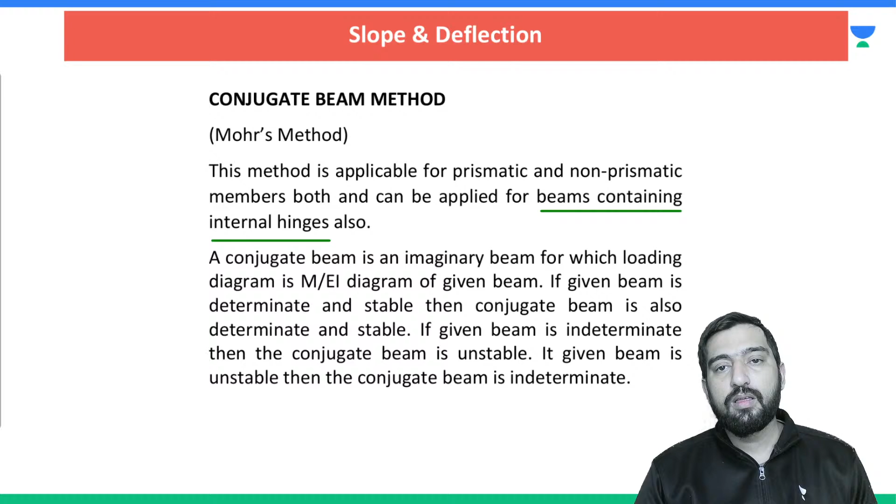So what next? Theorem 1, Theorem 2 clear, real support, conjugate support clear. Now you can read out these guidelines to draw conjugate beam method. So M upon EI diagram of the beam is loading diagram. If M upon EI diagram is positive, then loading in conjugate beam is upward, and if negative, then it is downward. Don't worry about this M upon EI diagram, whatever sign you want to take, you can take that.

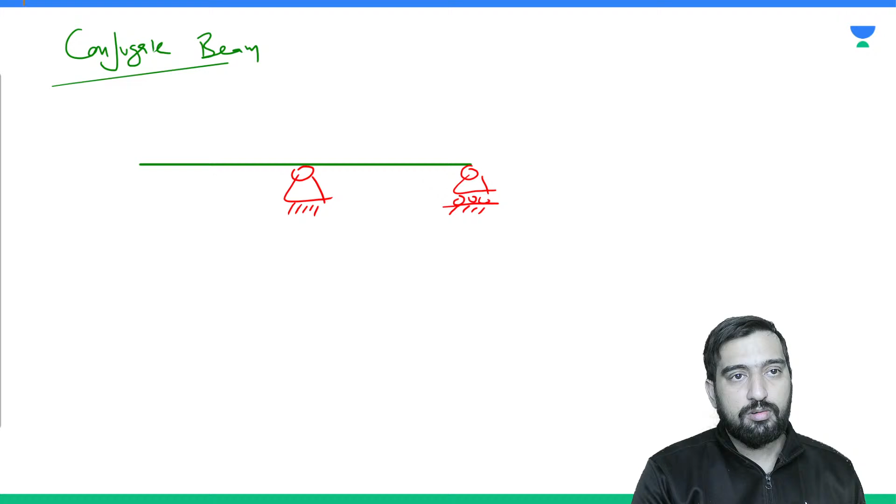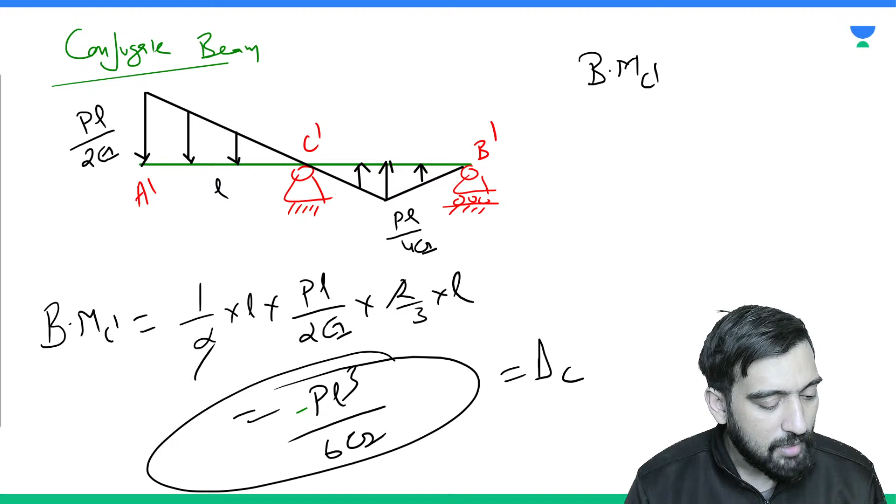It is the second theorem of Castigliano, which says the partial derivative of total strain energy with respect to load or force gives you displacement in the direction of load. This load, if it is linear, it is going to give you linear displacement, and if this load is rotational, it is going to give you slope.

So indirectly Castigliano has used the rigid body equivalency in your elastic body. Like we do have delta as work done upon load and theta as work done upon torque or moment. On the same fashion, he differentiated energy or work done with respect to load in order to get the deflection.

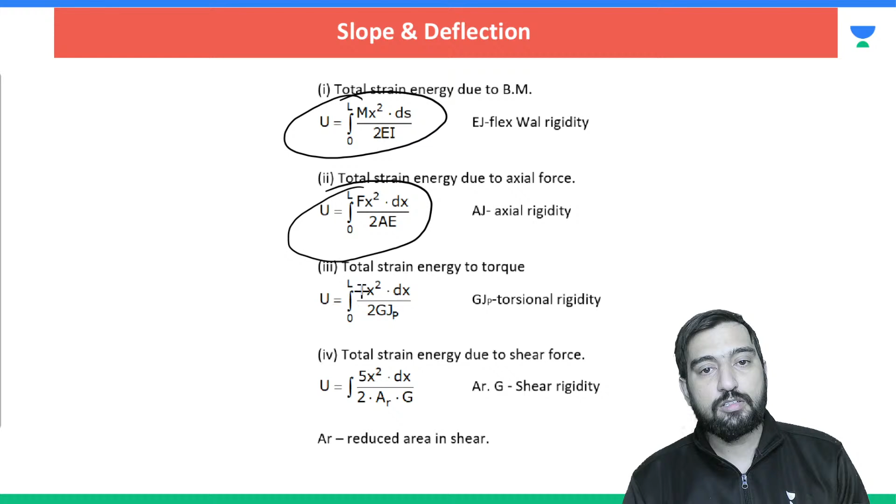So there can be different types of energy, like total energy due to bending moment, total energy due to axial force, total energy due to torque, total strain energy due to shear. So like that you can calculate the total energy. All you have to do is differentiate this.

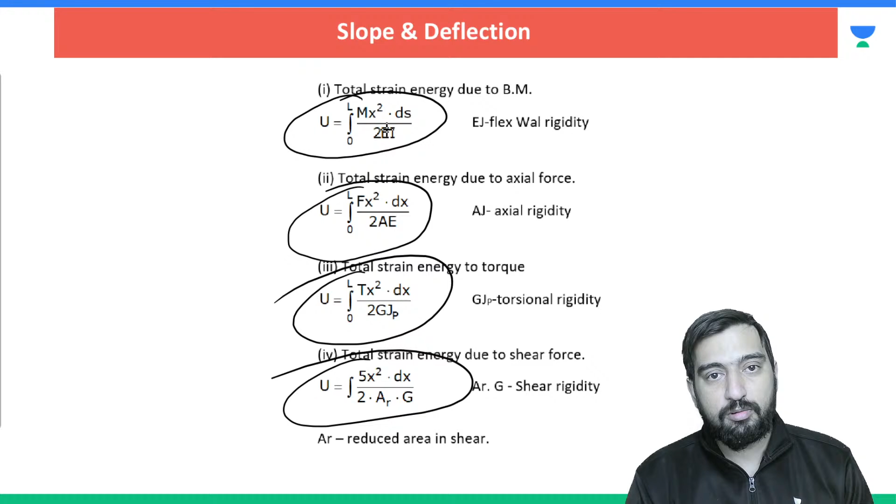So suppose we are focusing on beams and frames, so there we need to calculate slope and deflection due to bending moment. So if we need to find delta, it is del U over del P. What is del U by del P? It is m square into dx upon 2EI. So it becomes 2m del m over del P dash upon 2EI into ds.

So by this you guys can calculate delta. So delta is this much. Is it clear?

So this is the way to calculate delta. Similarly, you can also calculate theta. Theta is del upon del m dash of strain energy, and strain energy is m square dx upon 2EI. So theta is also coming out to be integration of m del m over del m dash over EI into dx or ds. So these two are the tools by using which you can solve any problem in any case of structure due to bending.

It doesn't matter whether you are working with trusses or not. In trusses the input is changed. You are working with arches, frames, beams, columns, even if you are analyzing them for buckling or bending, you can use them to calculate slope and deflection.

So based on this, if I want to demonstrate one problem, tell me any problem. Let me do a simple problem.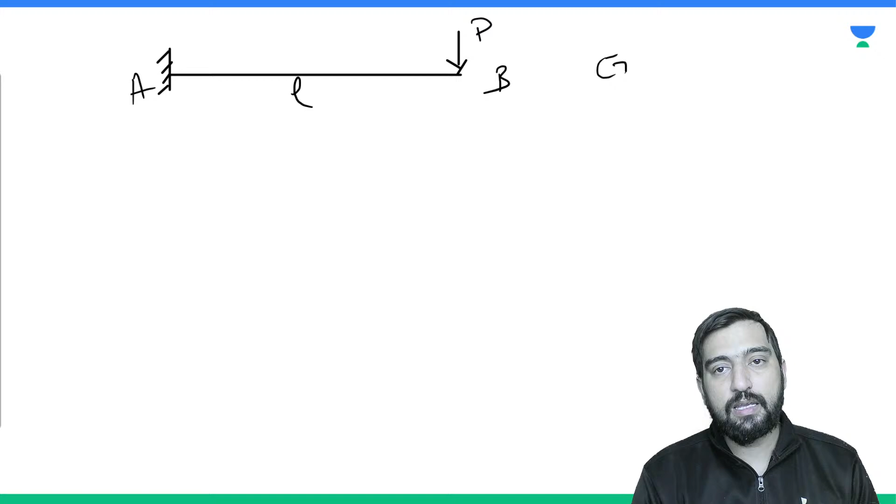Suppose if I want to calculate deflection at B, if EI is constant, then what to do? Write down the bending moment equation first. This bending moment equation is basically minus P into X, and we also need to calculate its derivative, because that is also required.

So now when it comes to delta, it is the integration of M del M over del P dash upon EI into dx. So it is integration of minus px minus x dx over EI, and this comes out to be PL cube upon 3EI, because whatever is the limit of the bending moment function, it is also the limit of your integration.

Is it clear, guys? So here you can get each and every value by using the strain energy method. The only thing I want to say now is that you should remember these results.

So if you need more clarification and more numericals on strain energy method, you can watch my special class.